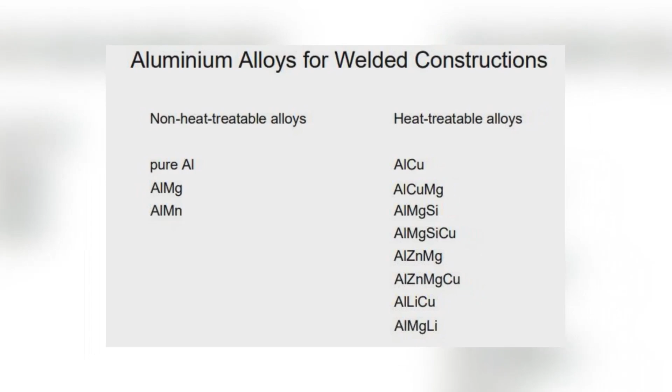The weldability of aluminium and its alloys is influenced by their composition and the welding technologies used. Pure aluminium and aluminium manganese alloys are very suitable for welding.

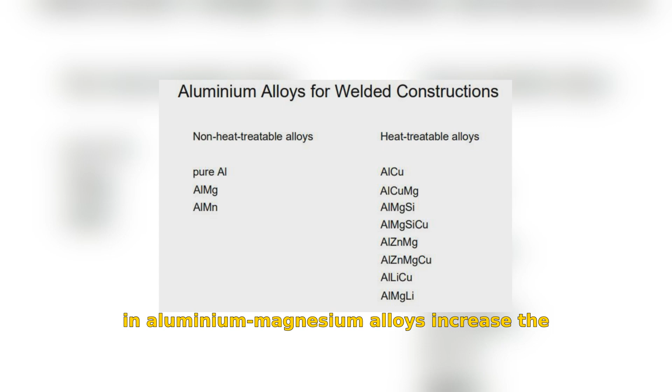Increasing amounts of magnesium in aluminium-magnesium alloys increase the oxidation tendency, making such alloys more difficult to weld. The magnesium burn-off is compensated for by using filler metals with higher magnesium contents.

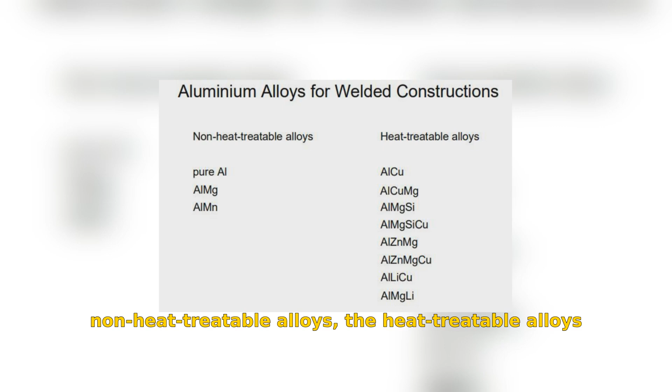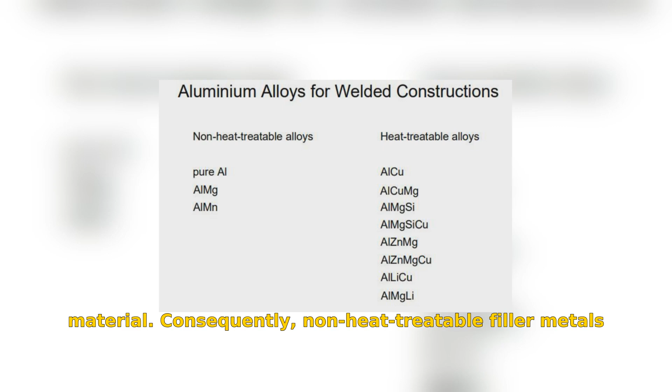Compared to the non-heat treatable alloys, the heat-treatable alloys have a lower weldability. It is also not possible to use filler metals of the same composition as the base material. Consequently, non-heat treatable filler metals are used for welding heat-treatable alloys.

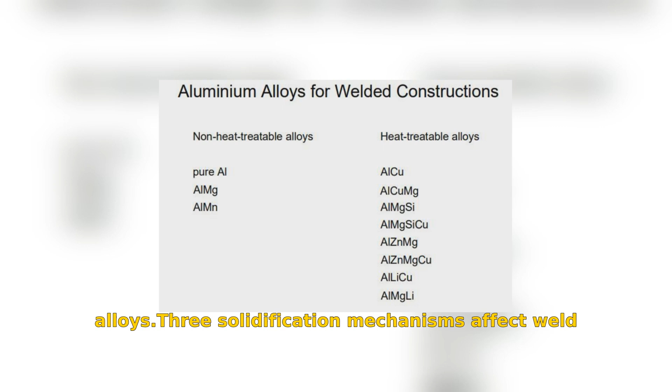Three solidification mechanisms affect weld cracking sensitivity: pure metal cooling, eutectic at grain boundaries, and critical temperature intervals. Choosing the right filler metal is essential to ensure adequate amounts of eutectic, which can reduce crack risk during welding.

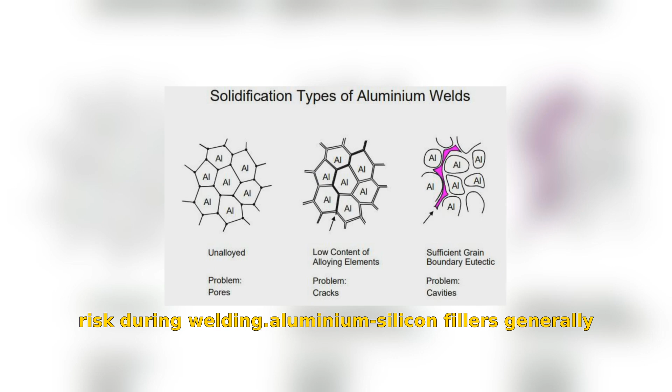Aluminium-silicon fillers generally present a lower cracking risk compared to aluminium-magnesium-manganese fillers, though this trade-off may reduce joint strength.

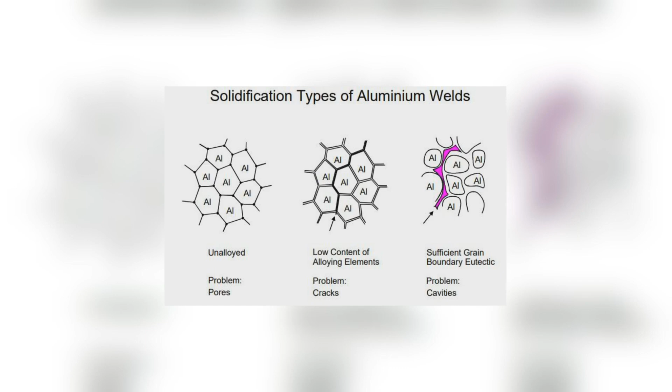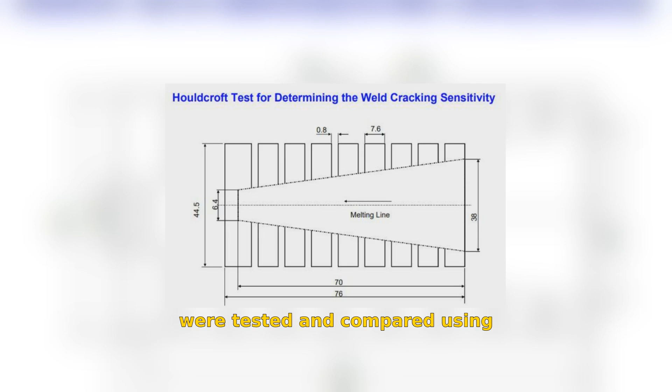The Houldcroft test is a well-known method for determining weld cracking sensitivity in aluminium alloys, evaluating both with and without filler metals. Nine aluminium alloys were tested and compared using the fishbone specimen.

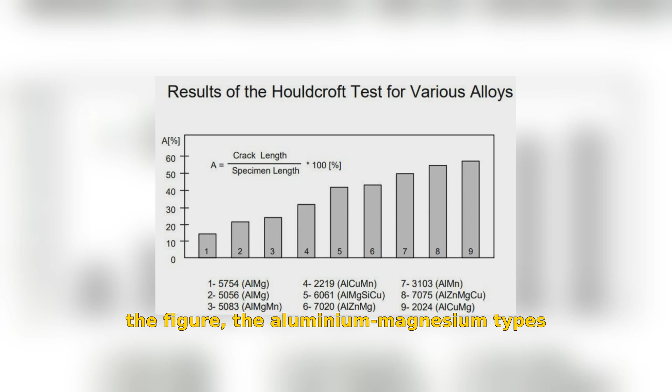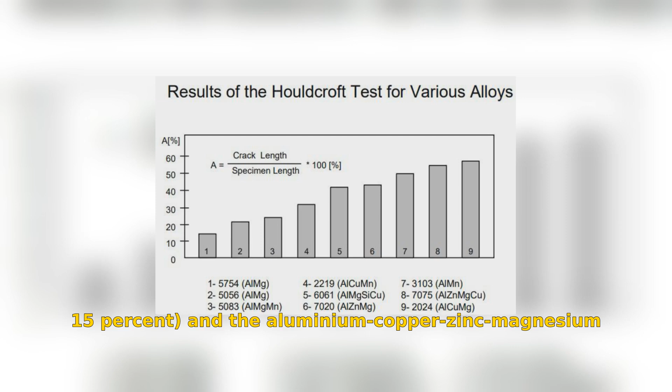The factor A, in percent, is a measure for the hot cracking sensitivity. As can be seen in the figure, the aluminium-magnesium types of alloys have a low hot cracking sensitivity, A about 15%, and the aluminium-copper-zinc-magnesium alloys build the other extreme with high cracking sensitivities of A about 60% and higher.

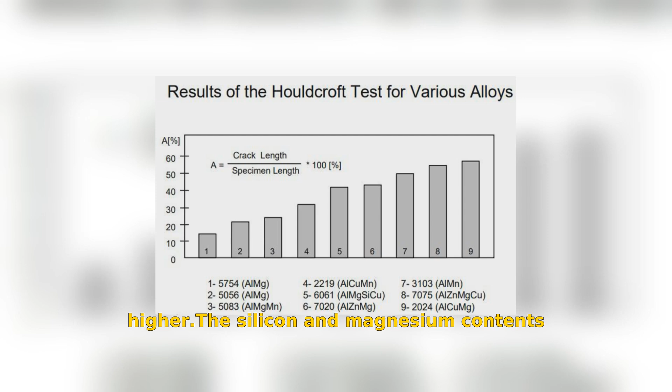The silicon and magnesium contents have a very pronounced effect on the weld cracking sensitivity. The heat-treatable alloys in particular have compositions which lie in the critical region.

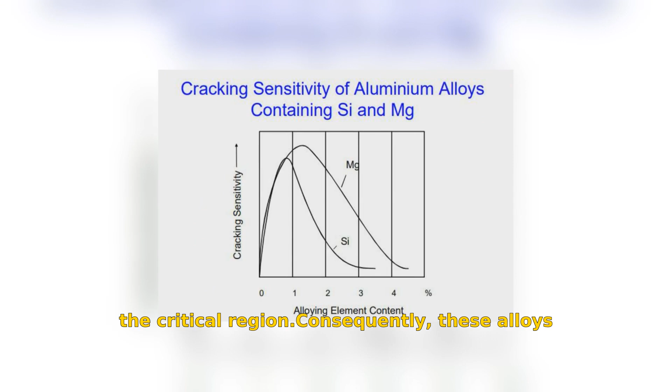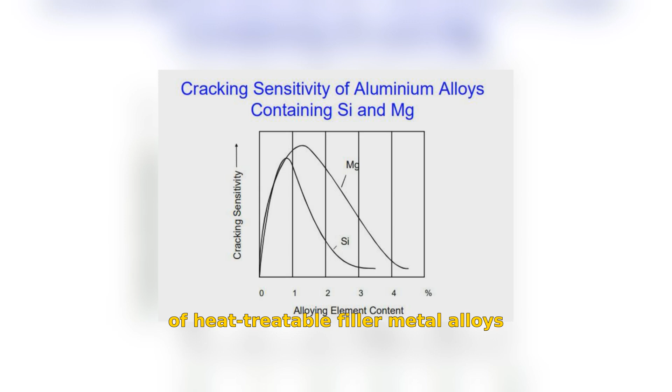Consequently, these alloys are welded using non-heat treatable filler metal alloys, even though this tends to reduce the strength at the joint. The use of heat-treatable filler metal alloys has proved to be unsatisfactory.

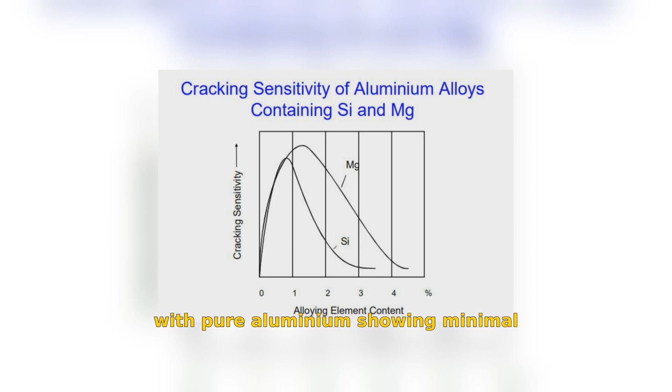Increasing solidification range heightens cracking susceptibility, with pure aluminium showing minimal sensitivity. Aluminium alloys with copper demonstrate pronounced solidification intervals, leading to significant cracking risks.

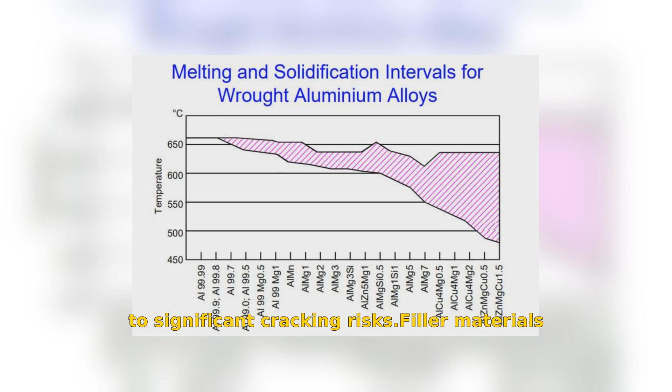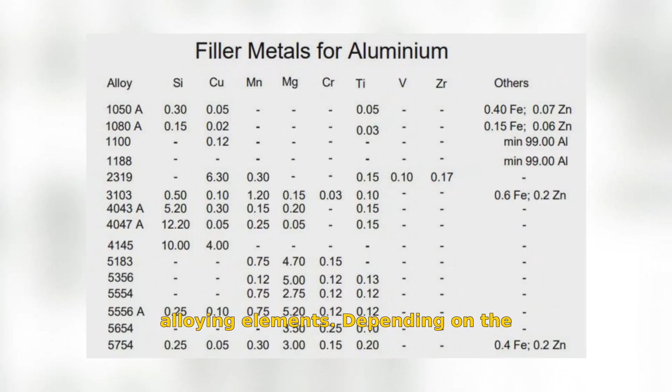Filler materials used can be divided into three groups containing silicon, copper, or magnesium as the main alloying elements. Depending on the alloy, varying amounts of additives can be added, for example, manganese, chromium, titanium, as well as vanadium, and zirconium additions to the alloy.

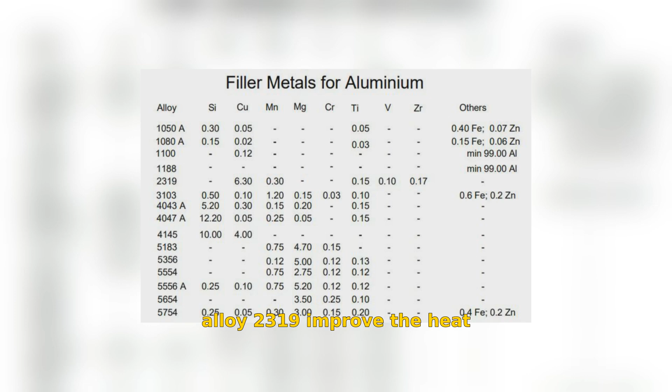2319 alloy improves the heat treatability and delivers a fine-grained structure.

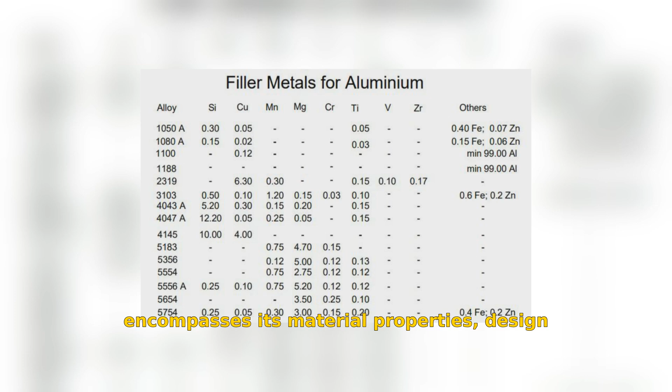The weldability of aluminium encompasses its material properties, design reliability, and manufacturing considerations, emphasizing metallurgical aspects.